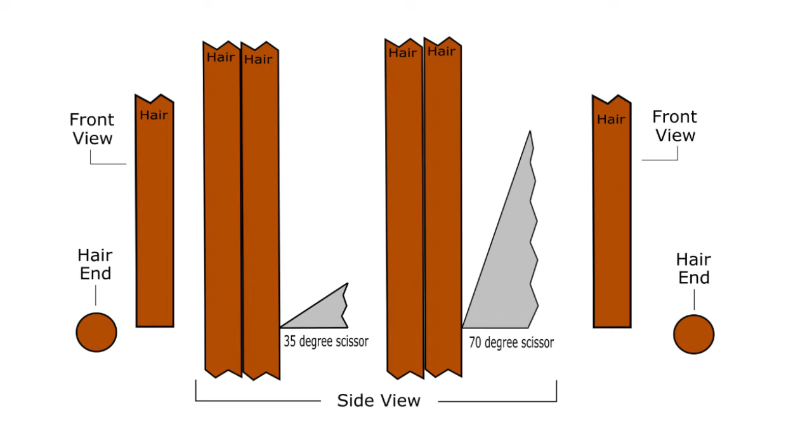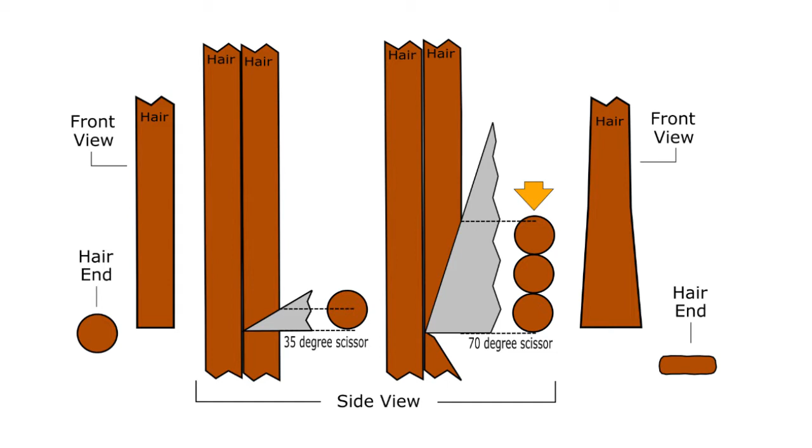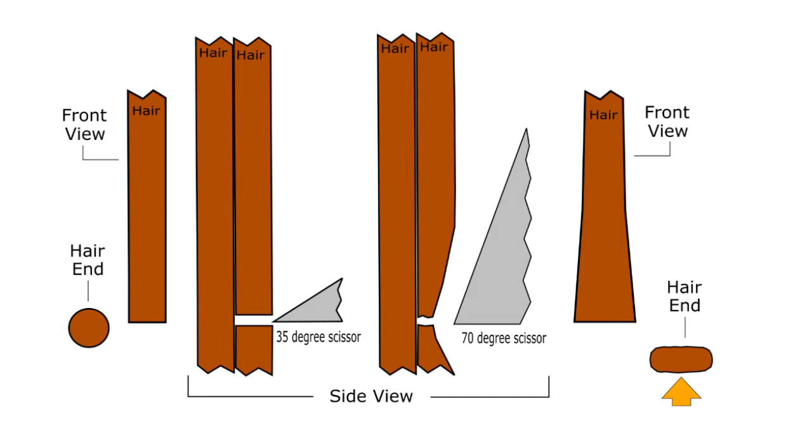This diagram shows cross-section views of a 35 and a 70 degree cutting edge about to cut into hair. A cross-section view just allows us to zoom in and see what happens as the hair is cut. Here we can see the hairs after cutting. Notice that the 35 degree blade has sliced cleanly through the hair, while the 70 degree blade is 3 times taller and has simply crushed the hair until it broke in half. The 70 degree blade has left the hair damaged, so it will not hang straight in the haircut and is more likely to create split ends.

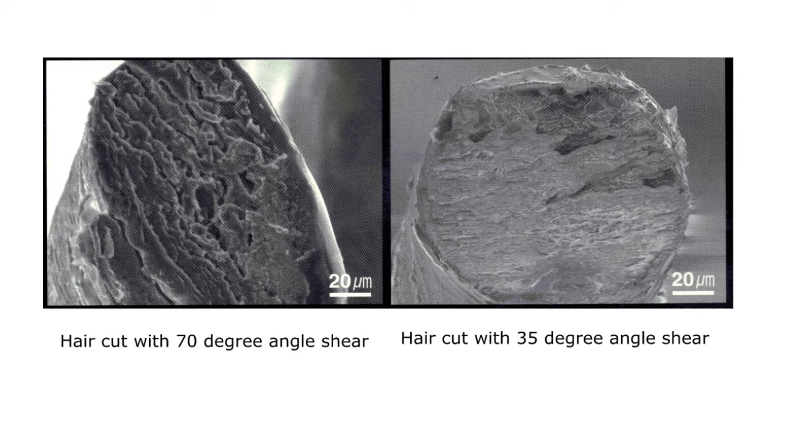This is an actual photo of hair cut with 35 and 70 degree shears. Not only is the hair damaged, but the stylist will have had to squeeze the handle 4 times harder with the 70 degree shear.

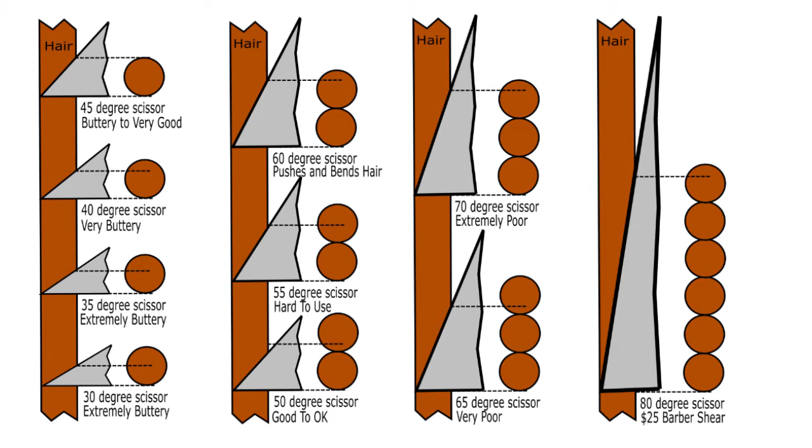In this comparison chart, we have noted the comments of stylists regarding each sharpness. You can quickly see that the 35 to 45 degree blades in the lower left are the best. 50 to 55 is not bad. After that, the blade height becomes so tall that the shear is very hard to push through the hair and begins to crush hair quite severely. We have never found a shear sharpened to 65 to 80 degrees that a majority of stylists feels cuts well.

So why would anyone ever sharpen a shear to 70 degrees? The first reason is that the cheap shears from places like Pakistan have metal that is so soft that it will be dull in a few days if sharpened to anything less than 65 degrees. Even at 45 degrees, the metal is just too thin and weak.

The second reason for 70 degree sharpening is that 35 degree sharpening is really hard to do. It's easy to sharpen from 55 to 90 degrees. The shear isn't very sharp in the first place. At 30 to 40 degrees, however, the cutting edge is so sharp that any misalignment will cause the blades to clash and dull each other out. It takes us 2 to 3 times longer to sharpen a shear than other sharpeners due to the additional alignment steps we have to do.

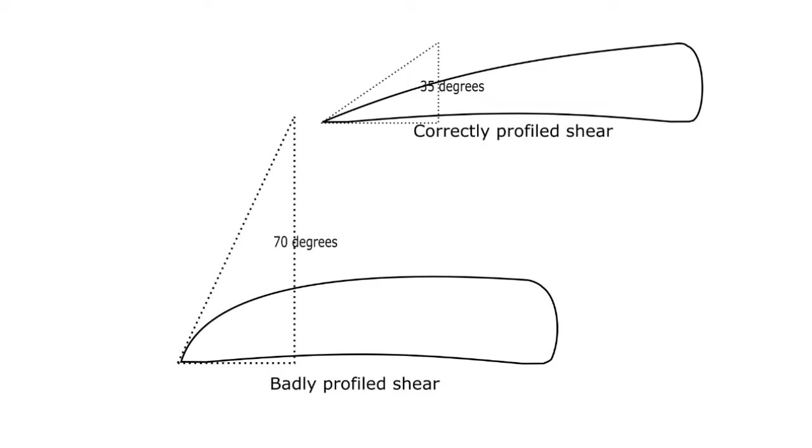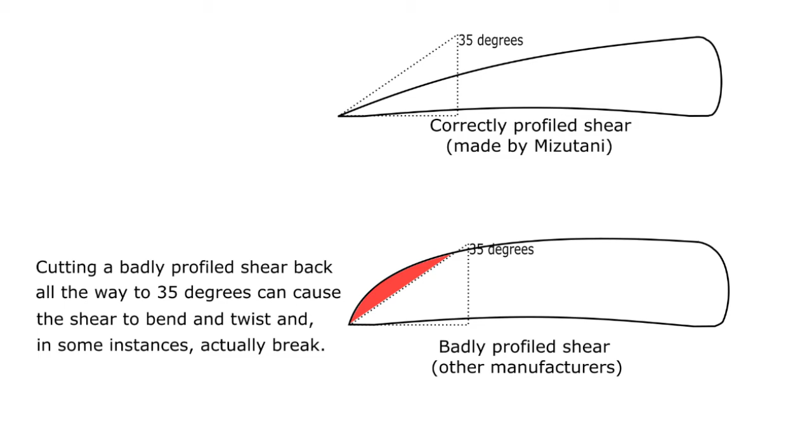The third reason is the shear was made perhaps with a fat profile. This diagram shows a correct and a fat profile. We are looking at the whole side of the cutting blade now. Look at how much metal needs to be cut away to make the shear 45 degrees. And much more to get it to 35 degrees. Shears made with fat profiles will never be sharper than 45 to 60 degrees. If we sharpen them more, the blades often twist, bend, and sometimes break.

Unfortunately, our research shows that a majority of shears are made with fat profiles. It takes longer to make a correct profile shear at the factory. More metal needs to be ground off during manufacturing, and the shear is harder to sharpen in the finishing steps.

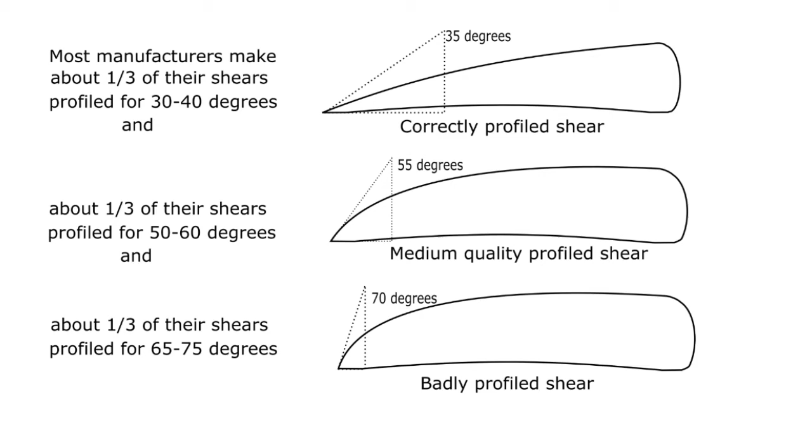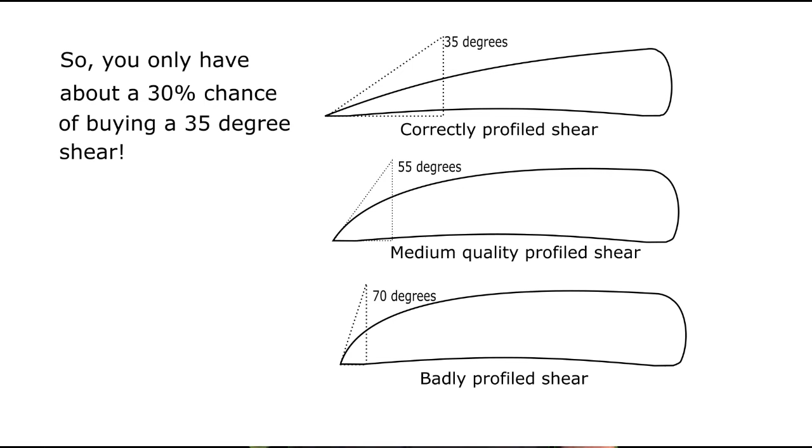Most manufacturers make about 1/3 of their shears profiled for 30 to 40 degrees, about 1/3 of their shears profiled for 50 to 60 degrees, and about 1/3 of their shears come out the very horrible profiled 65 to 75 degrees. We do not think this is intentional. It seems to be a quality control problem and a cost of manufacturing problem. But it means that you have to be in the lucky 30% to get a really good shear.

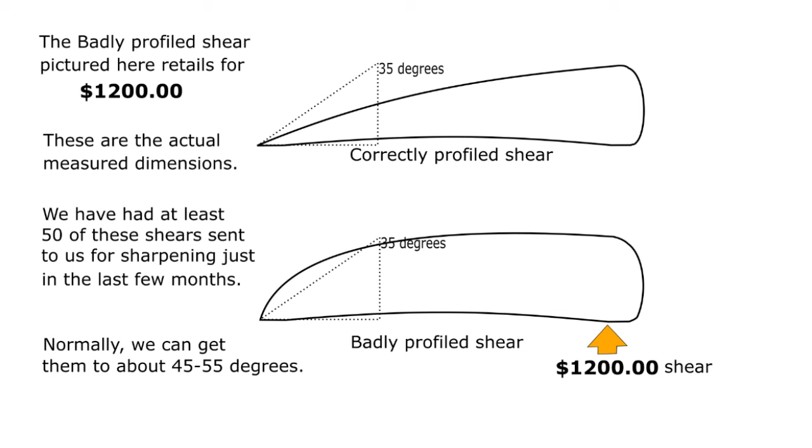Every week we get 10 to 20 shears from stylists who want us to sharpen their shear so it cuts just like their friend's Mizutani. Many of these stylists have paid $1,200 and more for these shears. If the profile is fat, we can make it better, but we will never be able to make it cut like a 35 degree shear.

The big advantage Mizutani has over other brands is that their 35 degree shears are all profiled for 35 degrees. Their scissor smiths train for 3 years before making shears and their quality control procedures are very good.